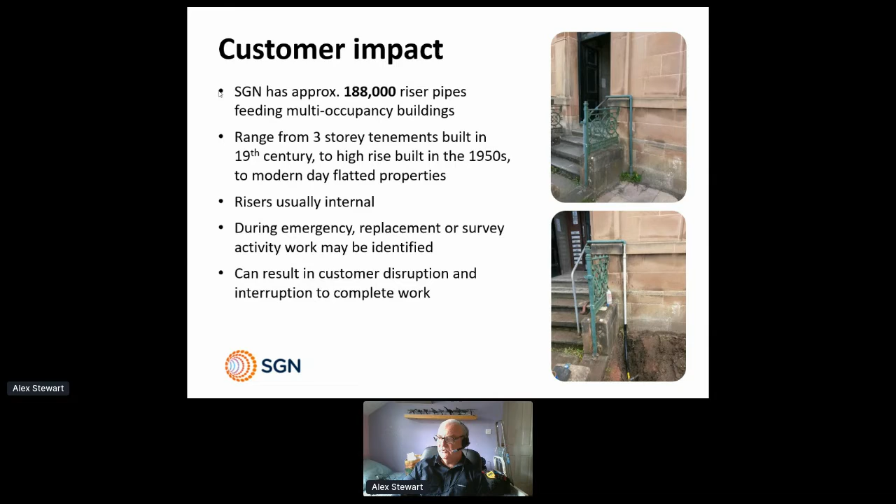So some common issues with riser work that we got from our operations guys. Again, as I said, customer access to individual properties. If we have to do any work in those properties, it invariably involves altering pipework and meter positions if we're renewing the supply. There's also the aesthetics of conventional replacement.

We've had a few projects recently in Glasgow and in London where we've done some work in what's classed as historic areas and conservation areas. So that has an impact with the planning departments.

The need to interrupt the supply to complete the work is always an issue, especially when you've got multiple customers, accessing to turn the customers off and back on again, resulting in customer inconvenience. It's not a one hit - we might be in the customer's house 3 times, 4 times, disconnecting and reconnecting their gas supply before we eventually finish, which can result in access problems.

They may not be able to give us access all the times, so that results in access out of hours. We need to attend out of hours to restore supplies, reconnect customers, get the supplies back on. And that all impacts on the speed of work.

Conventional replacement can take a number of days, from the smallest riser that might take you 2 or 3 days, to a multi-story that can take you weeks.

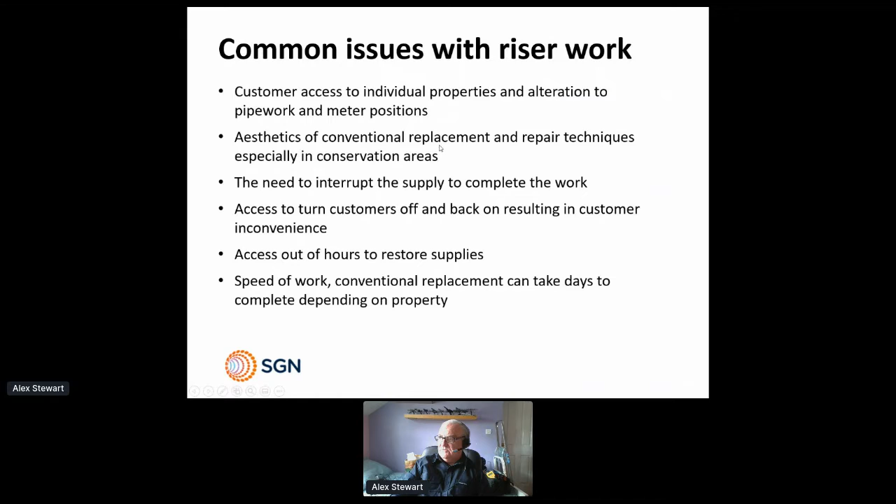So we looked through the industry and we came across this product that was being used in Holland called Microstop, which was made by a company called Ravetti. Pipetech are Ravetti's supplier in the UK. So we spoke to Pipetech. We thought, this sounds like an idea, looks like a solution to the issues that we've identified.

We got in touch with them and we raised an NIA project to look at the whole process, to try and take us through the certification of the process and the product, and actually get to an end result where we could impact the issues that we've identified.

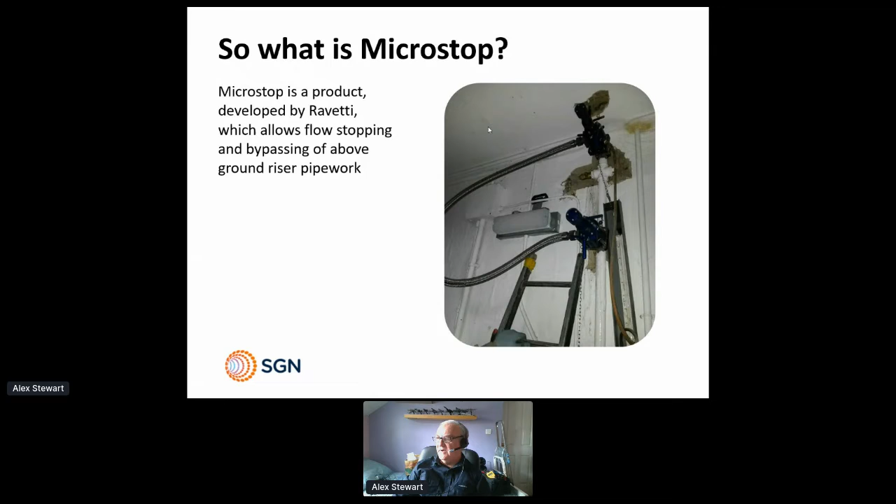So the project was split into 2 sections effectively. We had McCaw at that time, or Rosen as they are now, as the technical service provider. And we gave them a couple of remits.

First of all, we asked them to look to see whether we could match any of the information from Ravetti up against our existing processes to try and do a mix and match to see where the gap areas were. That information was scant, to say the least.

So we then resulted in doing a quite considerable testing program on the product - not just the tooling, but the fittings, its access, and how we would deal with it and the processes that we would deal with it.

Everything from pull tests, fire tests, flow tests, pressure testing, so that we could have some confidence that when we actually got to do a live field trial, or we actually used it live in the network, that it was going to work and give us that security of supply that we needed.

So we eventually got to that stage where we did some live field trials, and it started off fairly slowly in Glasgow, where we had, as I said earlier, a problem in a conservation area, in a Charles Rennie Mackintosh-esque building that resulted in complaints from customers when the initial pipes were run up during the mains replacement project. We went down, had a quick look at it, decided that we could do it much easier than the Repex solution, and actually hide most of the new pipework in the basement of the building, effectively leaving the customer with no change to the entry and the public areas in the stairwell.

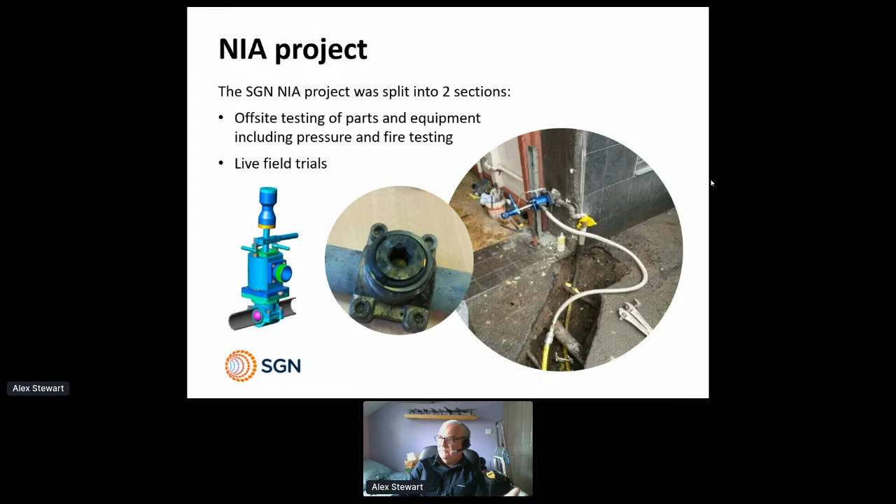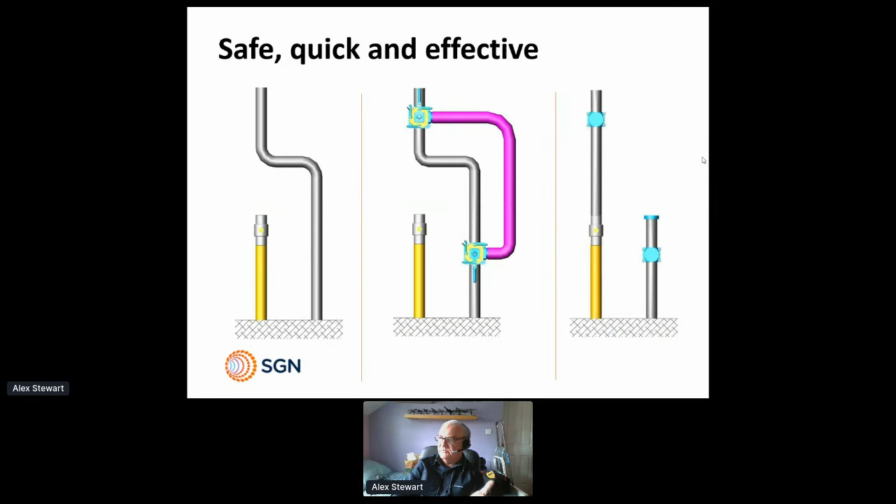This was the prime example in the first place, where we wanted to renew the below ground section of steel, because that was the most at-risk part of the riser. The sections of riser that we've identified, as I've already said, we do surveys on, and the bulk of these risers have extended life availability still available. So this was the primary reason that we did this initially, purely to connect a PE service back onto an existing steel riser. Whether that's the way the diagram shows here, or whether we look at trying to do an insertion through the existing supply, it meant that we minimised the amount of disruption within the building.

As we moved on, the depots themselves quickly took up the mantle of this product, and they started to look at other things that were causing them issues. They had repairs where we had damaged transition fittings at the entry of the buildings where someone had hit it with something. They had some repairs within the building itself where customers had drilled through the riser when doing DIY type scenarios. They had connection jobs that required a number of weeks' notification to customers to turn them all off, and that impacted on the customer service side of things.

And all of these, as we went through this, the operations side of SGN found a solution to by using Microstop in various different ways to remove uncommon materials from risers, and that had an impact on the customer satisfaction scores that we had. The fact that we didn't have to physically access customers' premises to do any of this work, the fact that we didn't have to physically disconnect the customer's supply, and then the impact on all of that, as I've said earlier, is that we don't then have this issue where we have to send what are effectively emergency workers out of hours to common no-gas situations where customers have been left turned off because we've had to do work during the day.

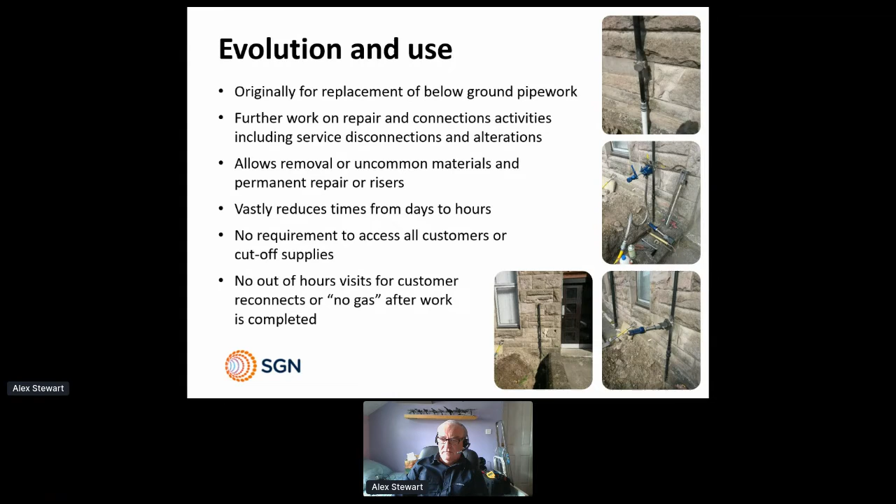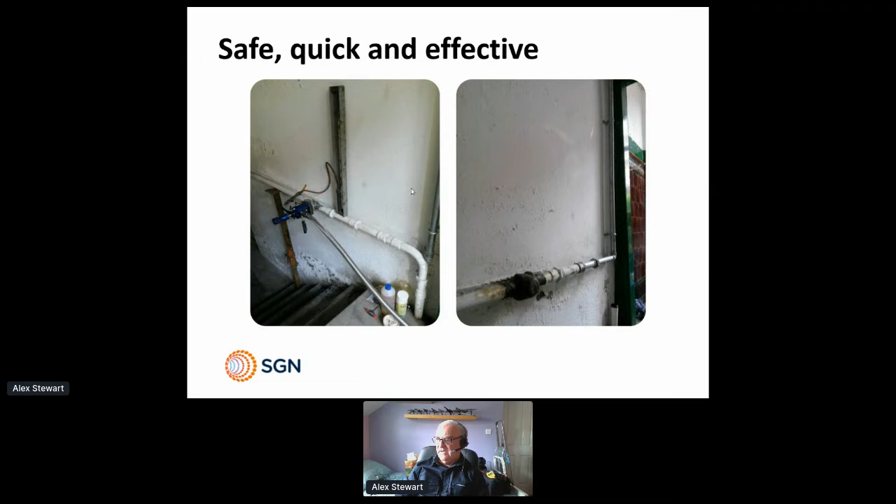So what we've ended up with, after a number of tests and a number of field trials, and we actually did about 110 different field trials during the project itself, is a very safe, quick and effective way of doing the work on a riser that we need to do without having the impact on either the customer or ourselves. It gives us a much quicker solution where we can effectively complete the job in a matter of hours rather than days, without the need to access the customer or turn the gas supply off at all.

So, in summary, Microstop is a very quick solution to riser replacement, repair or connections work. It's tested off-site and on-site and approved for use within the SGN network. We've actually rolled it out to both Scotland and Southern, and they're actively using it in their day-to-day operations. It doesn't require access to the customer premises or alteration to the internal pipework. There's no requirement to isolate supplies or interrupt any customers. It's much quicker and cleaner than a conventional technique, and it's more aesthetically acceptable in common areas than conventional replacement or repair techniques.

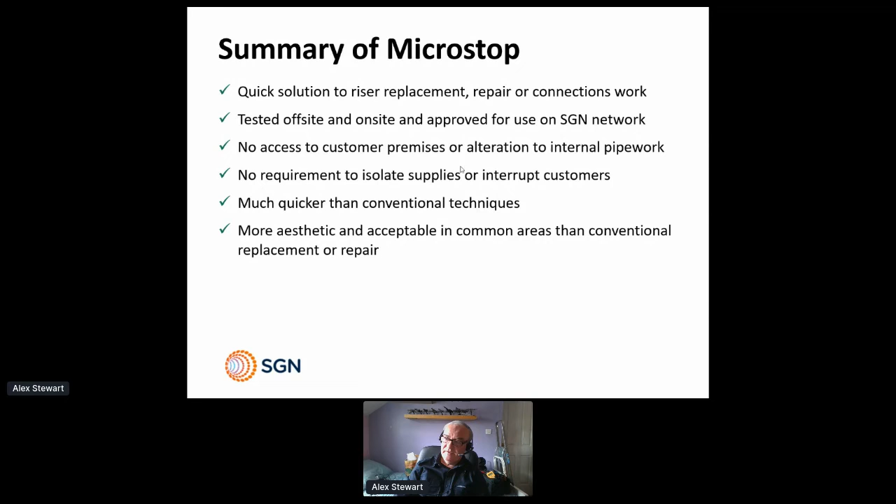And I'm happy to take any questions from that. Well, that's excellent. Thank you, Alex.

Just by listening to your presentation, I can see some of the obvious benefits you highlighted. So a couple of questions. First, around monetary value - you spoke a lot about customer service. Could you put a monetary value to the benefit of Microstop?

The monetary value is difficult because it depends on the scenario. We've got many different types of risers. We predominantly did the field trial in Scotland on risers in the early 20th century building type scenario, and we'd suggest you're probably saving 30 to 40% of your standard riser cost, which goes up considerably depending on the riser scenario. If you're not having to do external high-rise scaffolding, there's a major impact on both timescales and cost.

In terms of sizes, does this cover 3/4 up to 2 inch? No, it's 1 inch to 2 inch at the moment - inch and quarter, inch and a half, and 2 inch. There is a 3 inch variant which we haven't field trialed yet, but our operations guys in the south are actively looking at developing that, so the full size range for the product will be 1 inch to 3 inch.

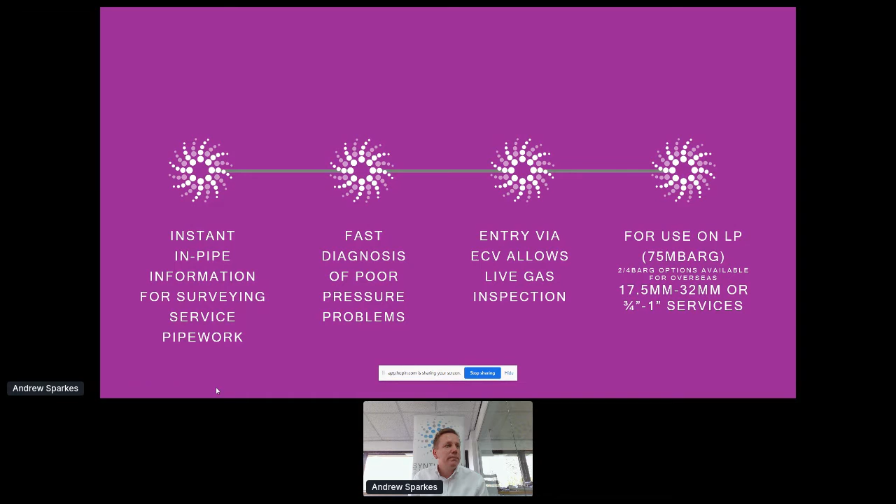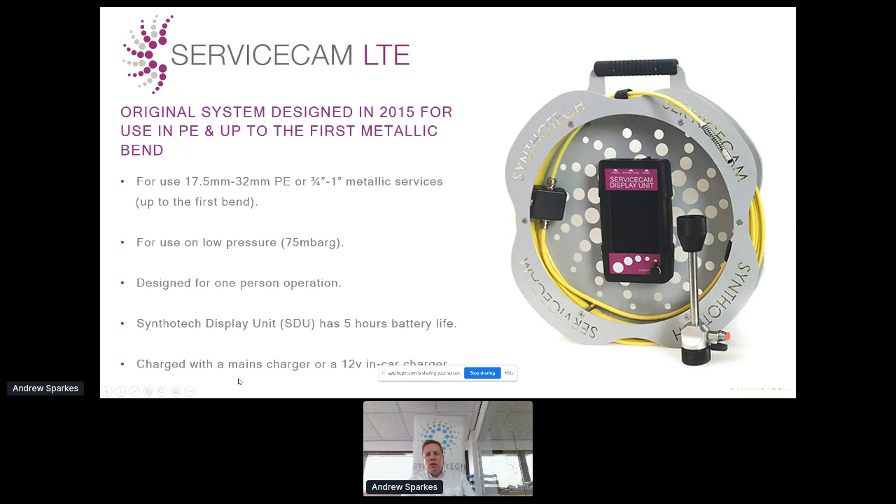The first ServiceCam, launched in late 2015, was ergonomically designed to be a one-person operation and to be able to navigate up to 2 90-degree bends in PE line services and up to the first bend in metallic services.

The kit comes with a bespoke 9.5mm camera head with shortened focal length due to the size of the pipe it will enter. It has 6 LEDs to illuminate the pipe and a spring to allow bend navigation.

The picture from the camera is viewed on a compact and functional ServiceCam display unit, which is battery powered for up to 5 hours use from full charge. For charging, a 240 volt main charger and 12 volt car charger can be used.

There is a low power indicator on the screen, and if recording is required of any footage seen, then the camera can be linked to the SKU recordable unit, which is part of our main survey kit.

The insertion system is suitable for both 1-inch and 3/4-inch ball type ECVs. It will screw directly onto a 1-inch BSP thread, with MSEX adapters available for 3/4-inch.

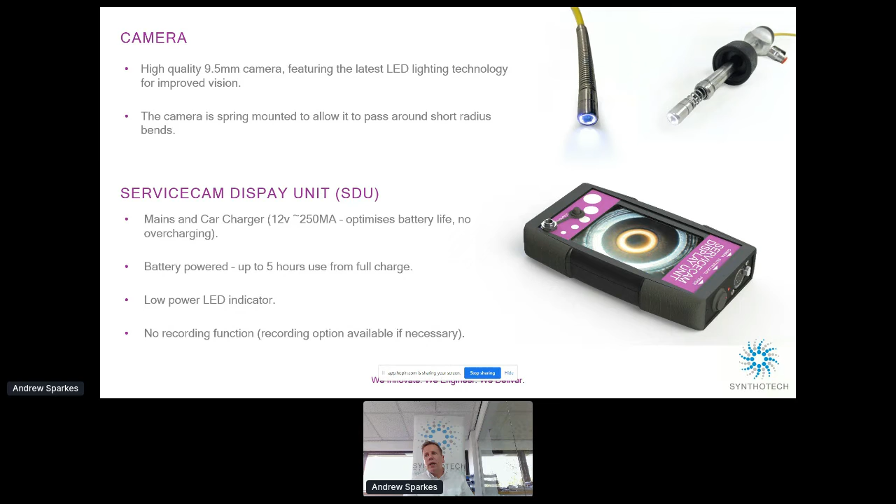In terms of glanding, the ServiceCam is made up of 5 elements: 3 rubber seals and 2 O-rings. Silicone grease should be used sparingly to help the camera head through the rubber elements prior to survey.

Since its launch, the benefit of this product to the gas distribution industry has been immense, from quick and effective fault finding on 1-inch line services to rapidly identifying poor pressure to a property, finding obstructions or water in the pipe, being able to quickly trace the line of a service pipe and locating mains connections.

For build-overs and GSMRs, cost savings from no excavations on expensive customer driveways, and reducing fault-finding works by over 2 hours. Listening to feedback from the gas operatives using ServiceCam, the second version was developed with a tighter spring to ease the distance pushed and also reduce snagging.

When used in conjunction with the specially designed survey guides, this enables the camera to navigate up to 3 metallic bends in metallic services from 3/4-inch up to 1-inch. The increased functionality these additions have given means ServiceCam is the first tool out of the bag when finding faults on services.

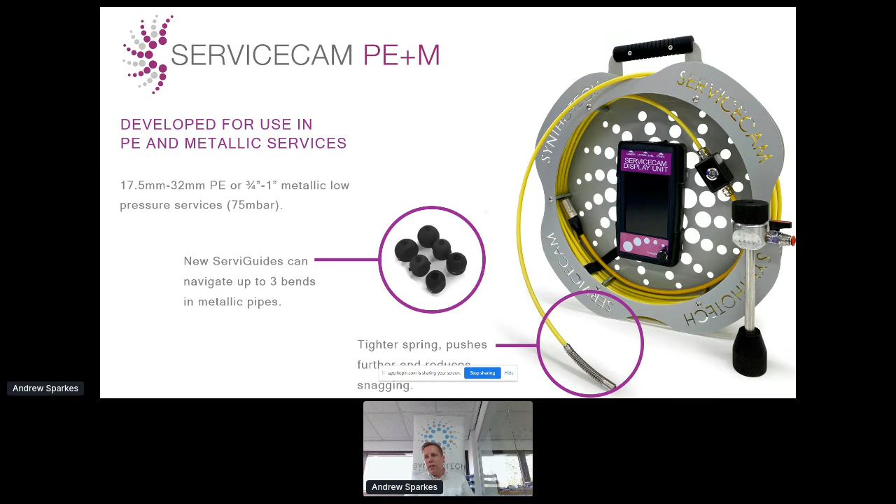Synthotech's international distributors soon began to hear of the success of ServiceCam in the UK gas market, and opportunities arose for the third version of ServiceCam to develop, allowing surveys to be completed at up to 4 bar in pressure. Other new additions of a new enclosed lock and reel frame for easier unreeling inside properties, and meterage shown on the display to pinpoint the exact location of an issue, were incorporated.

Ireland, Colombia and Australia are now avid users. As an example, in Colombia, the 4-bar system is used for investigating potential gas theft and can easily detect where services have been tampered with. ServiceCam in this particular country paid for itself on its first job, where an illegal bypass had been added to the service, saving the gas transporter an untold amount of lost revenue.

Just to confirm, the ServiceCam range now includes the ServiceCam LTE for PE only, ServiceCam PE and Metallic, and ServiceCam Pro.

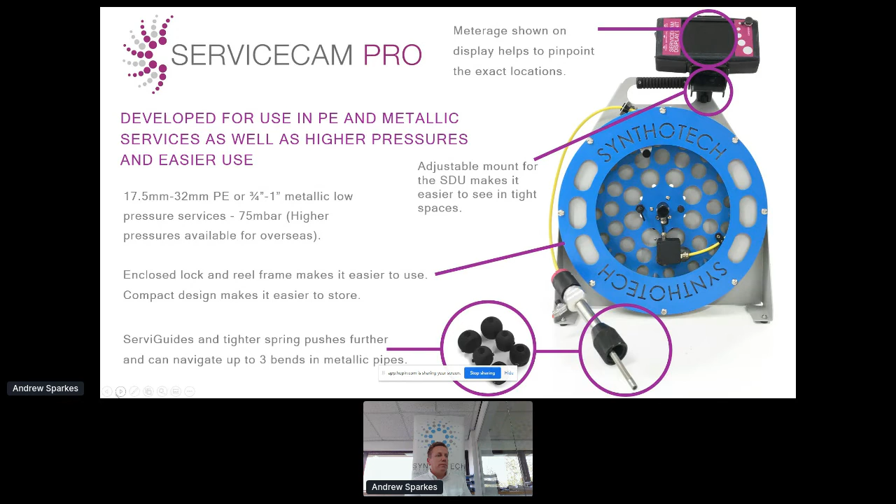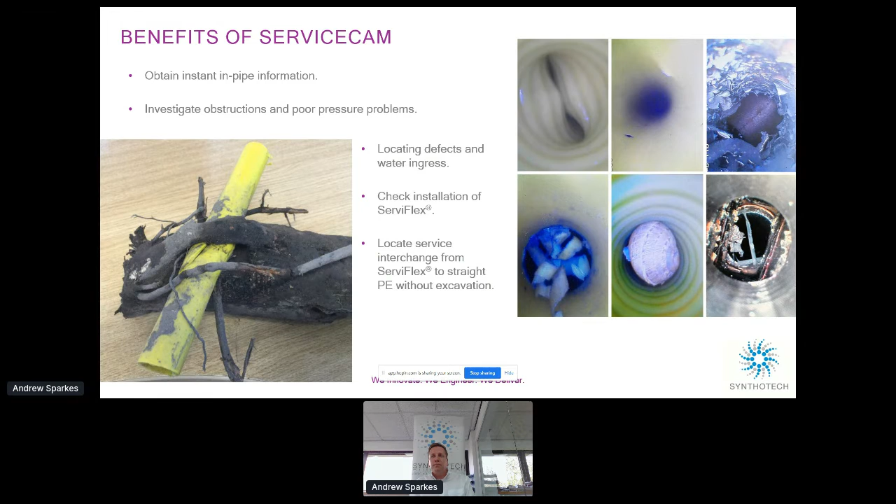Throughout the 4 gas distribution networks, there are numerous examples of how using ServiceCam can save the network money. From locating and pinpointing services on DR4s, reducing the amount of time on site and eliminating misdigs, saving on average £1,250 per job. On GSMR, ServiceCam was shown to save over £227.

A build-over service was surveyed and located within a new driveway, reducing the disruption to the customer, and was shown to save £645. And then a blockage in a steel service pipe under a new driveway was shown to save £450 by reducing the equipment and personnel required on site.

This is just to name but a few.

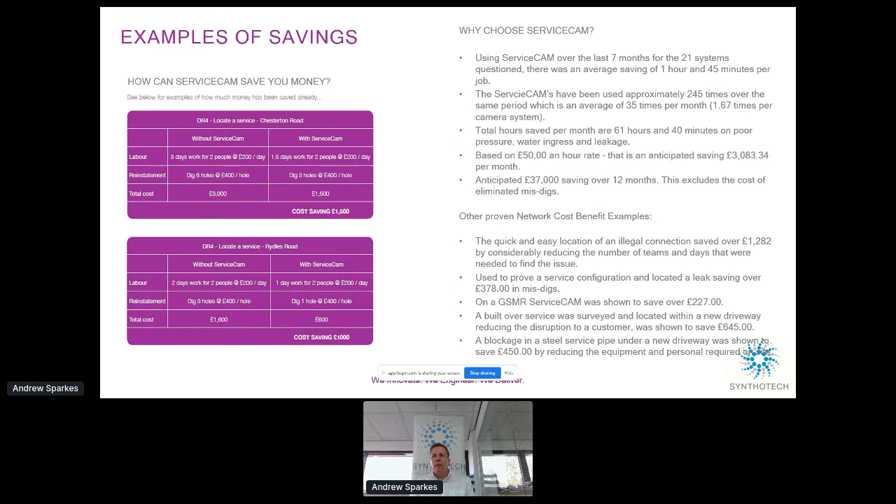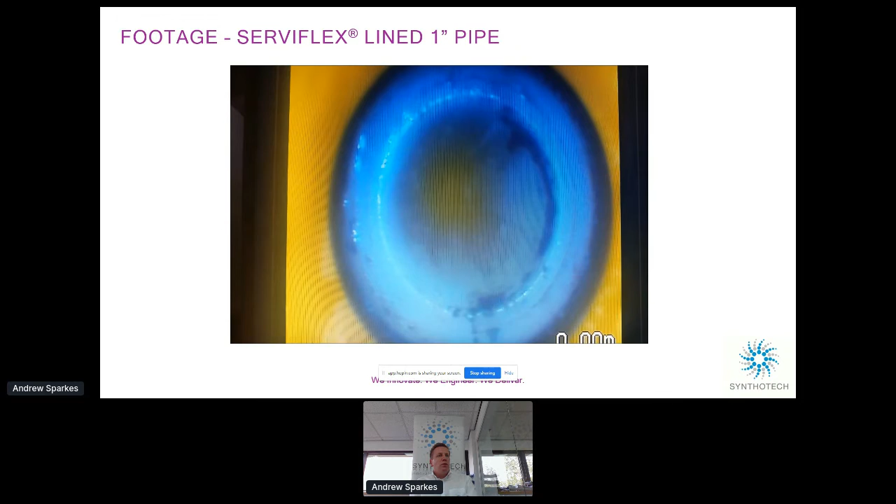The footage in the video above shows where both PE and ServiFlex lined pipe have been damaged and water has ingressed into the pipe, forming water globules and white marks from water being inside the yellow ServiFlex pipe. This gives the repair teams chances to do the repair work and make informed decisions.

Synthotech, as part of an NIA with Northern Gas Networks, developed a water extraction ServiceCam after this to be able to get the water out of the service at the same time.

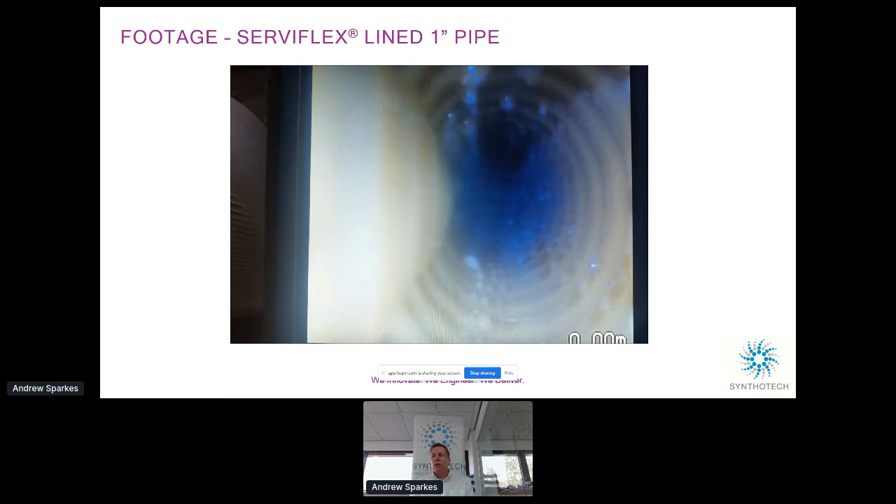Recent customer satisfaction surveys of the networks have given ServiceCam a 4.9 out of 5-star rating. And now that ServiceCam can survey both metallic and PE pipes, it has become the go-to piece of equipment to save time and money when looking for issues relating to service pipes.

The feedback gained was that using ServiceCam saves on average 2 hours per job and is used on PE services 2/3 of the time.

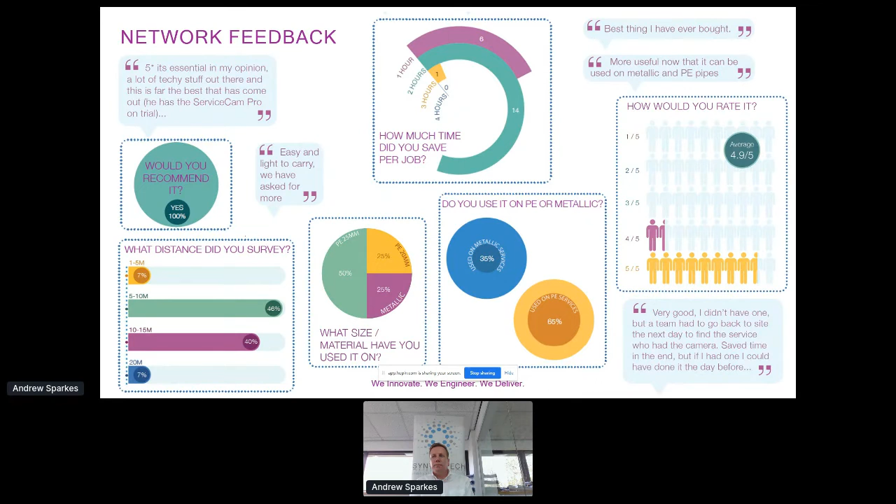All 4 networks have seen the benefits of investing in this uncomplicated and easy to use one-person traceable camera, highlighted in the numbers that continue to grow across the country since its first introduction some 5 years ago.

In conclusion, the benefits of ServiceCam include emergency response and fault finding, investigating obstructions and pressure problems, locating defects and water ingress, and locating service interchange from Serviflex to straight PE without excavation.

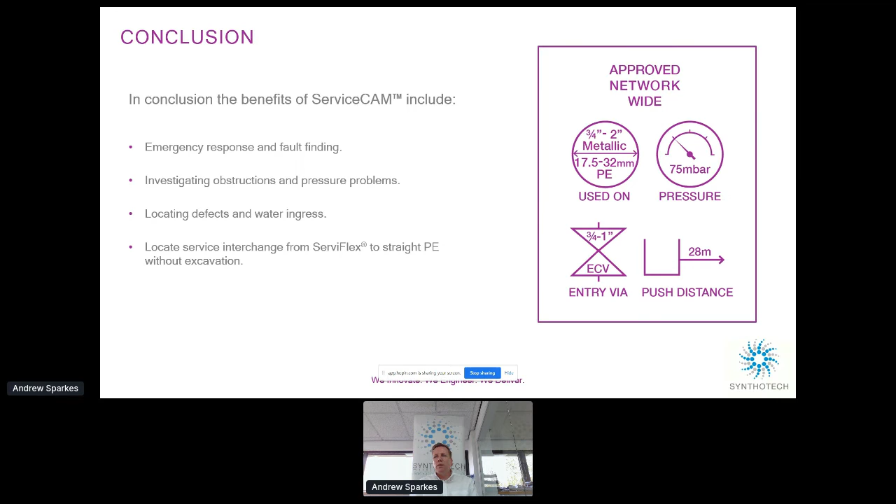And that's it. If you need any further information, please feel free to contact us, and happy to take any questions.

I guess just a question actually, Andrew, is the kit supplied, and is there a lot of training involved for teams or users?

Yeah, there is training. It's only a couple of hours training that's required. It's just to go through safe insertion of the camera, because obviously it's going into live gas. We generally would train, before COVID, 6 operatives in a classroom basis on a designed rig, and that would take approximately 2 hours. But obviously, during COVID times, we've actually developed a video online that can be used to do the training.

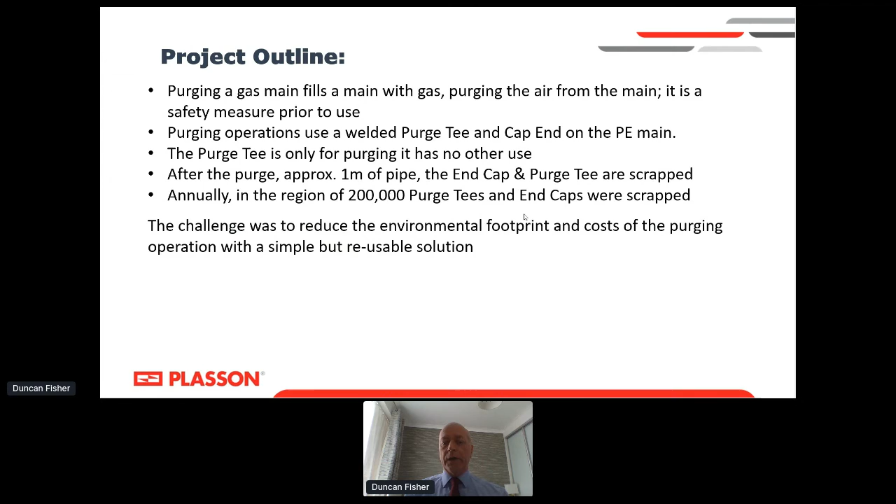After it has been purged, approximately a metre of pipe, the end cap and the purge tee are typically cut off and scrapped. Annually, that's in the region of 200,000 units being scrapped. The challenge was to reduce the environmental footprint and the costs of the purging operation with a simple but reusable solution that was easy to implement.

Our partners in this were Cadent and ROSEN. Cadent actually commissioned the project, and ROSEN were deeply involved in the technical aspects of specification and of the actual testing of the system.

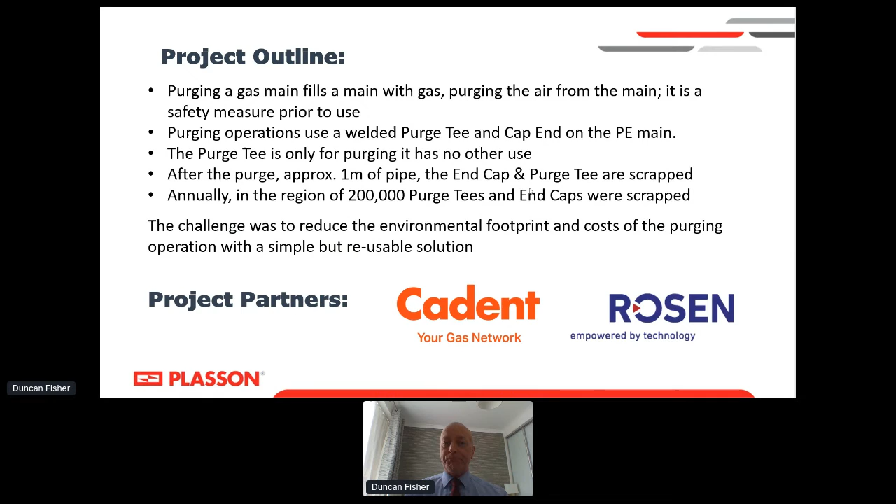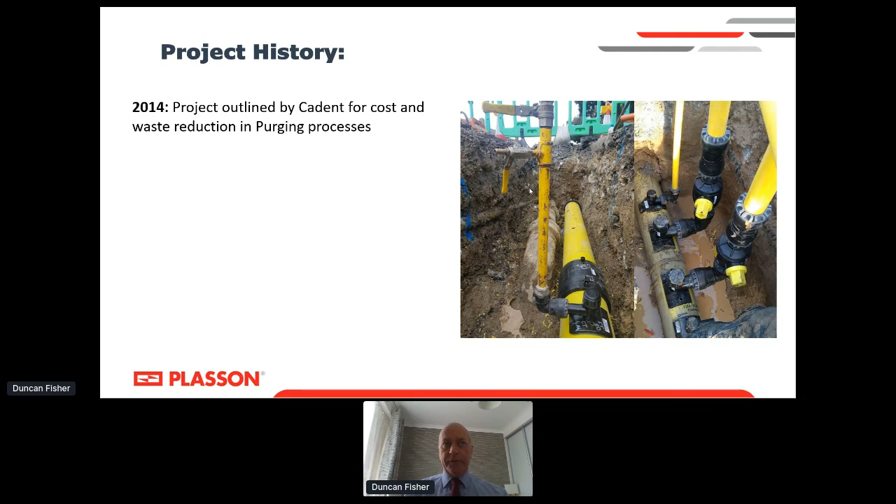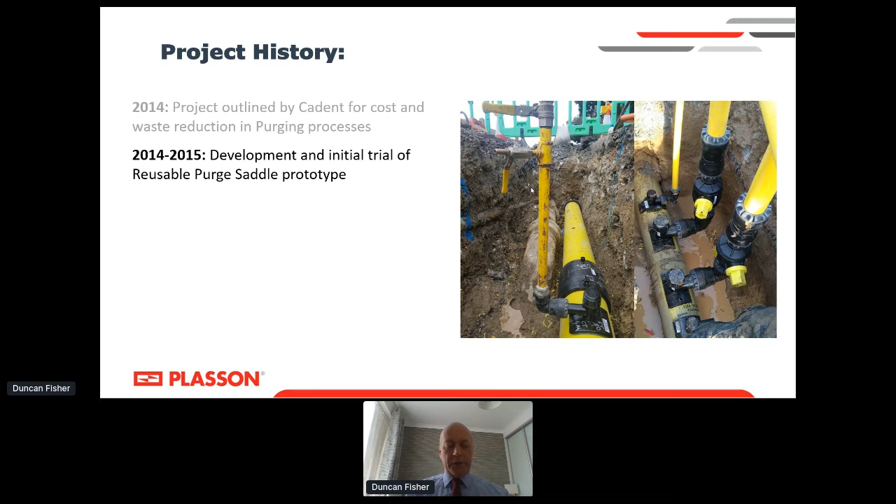In project history terms, we started when the basic outline was identified by Cadent in 2014, and for the next year we worked on a prototype of a purge saddle that was reusable. Having developed and field trialed some prototypes, it was decided to change direction, and in 2015 to 2018 we developed the range of fittings shown in the pictures to the right, for both purging and for temporary bypasses.

These have been in use now for a number of years very successfully, but they're still based on a top tee welded to the main. It's a standard top tee and not dedicated to purge, which means it could be reused for the final domestic tie-in, but it still, in a lot of cases, was sacrificial.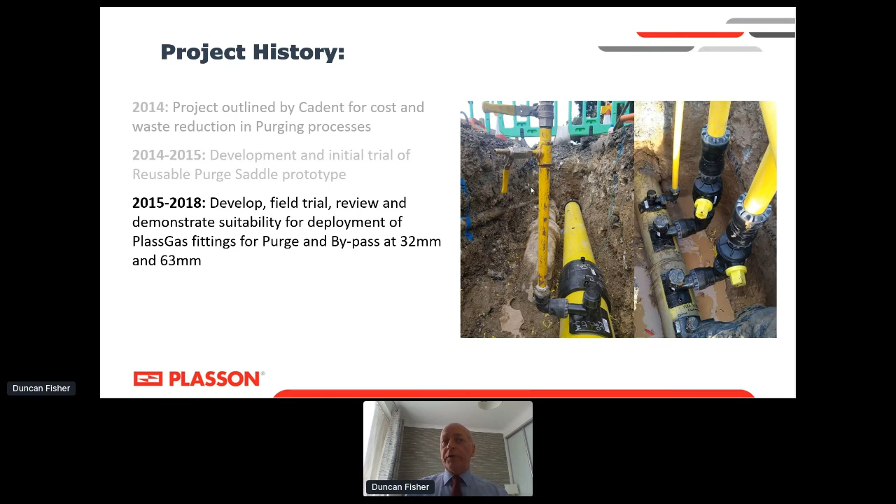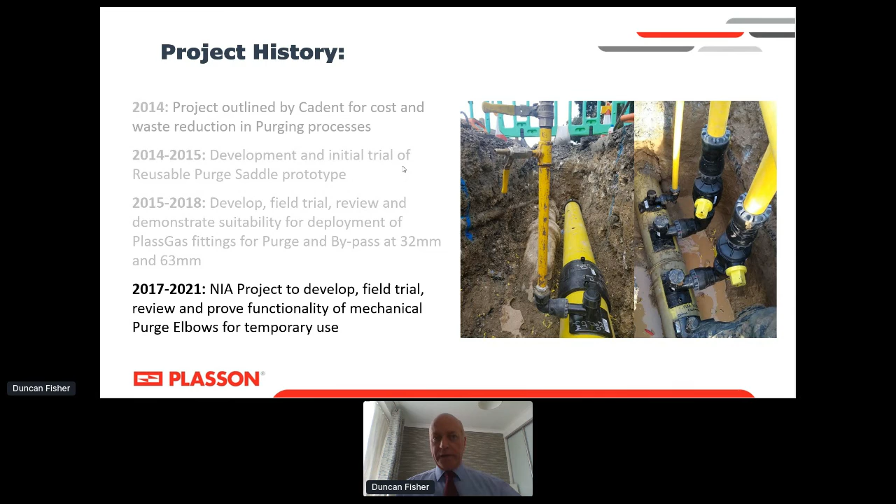So after getting partway through the project, we reviewed it, and then in 2017 started work on a project to develop an alternative solution which had no sacrificial part whatsoever. It was an NIA funded project and now has been concluded.

The product performance specification was written by ROSEN as a follow-on to the previous work we had been working on. The concept was initially tested with full laboratory testing by ROSEN, and then a field trial with Cadent staff was conducted by ROSEN.

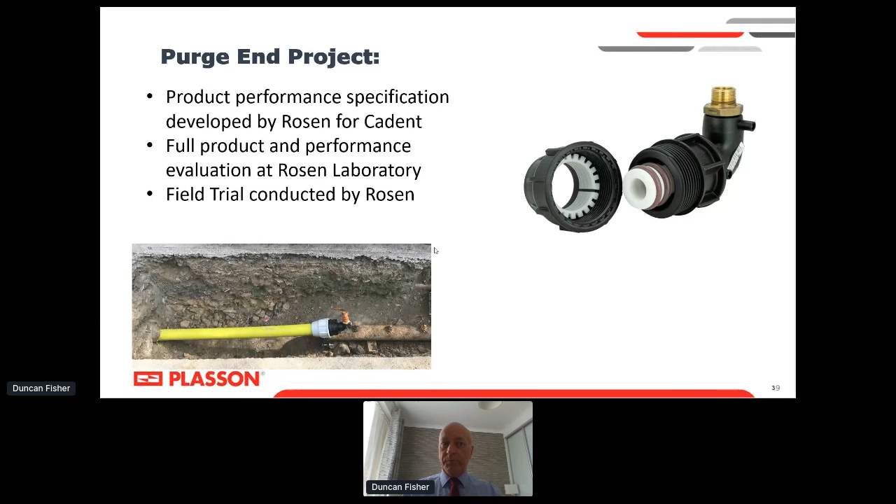There was analysis of the fittings after use in the field. Having recovered them from the field after multiple uses, we retested them and analysed that retest result. We also took in user feedback from the men in the field who had actually used the fittings.

There was also a need to develop an appendix to PL3, which is the specification for mechanical fittings for use on gas mains. An Annex P has been written for temporary use fittings, which I believe is due for publication shortly. The NIA Closure Report was issued in February of this year.

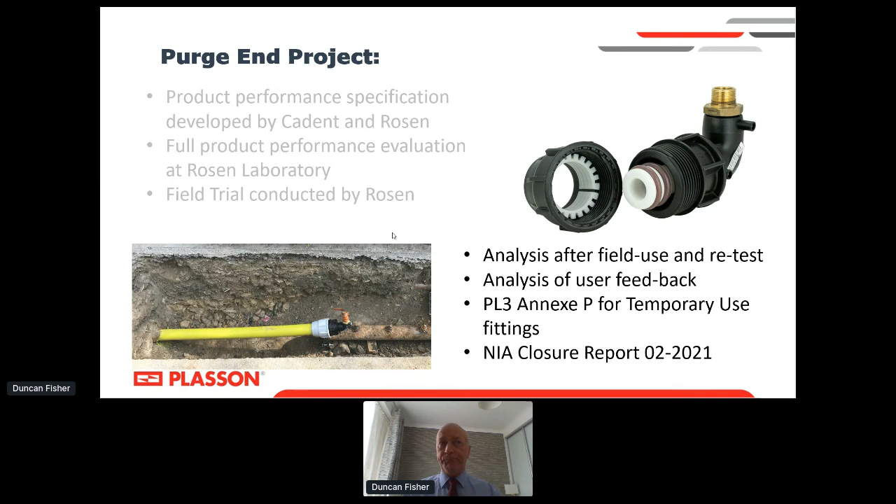Essentially, a purge end fitting is reusable. We reckon that in excess of 50 uses would be easily achievable.

The advantage of this temporary use fitting is that each time it is used, it is tested for integrity before gas gets anywhere near it. So you have a high degree of confidence that once the fitting has been assembled on the pipe and tested, you will have a very satisfactory outcome.

There are two seals that seal inside the bore of the pipe, which escapes the problems associated with sealing on the outside, which can be damaged on this sort of pipe where it has been inserted through an old main. The joint is end load protected for security so that it won't pull off the end of the pipe.

It's estimated that it will pay for itself within 5 to 10 uses, depending a little bit on how you calculate it.

One area of potential saving that hasn't been quantified, but which we believe will be of value to the industry, is that it has the potential to reduce the excavation size for the receiving pit when you're doing a pipe push through an old main.

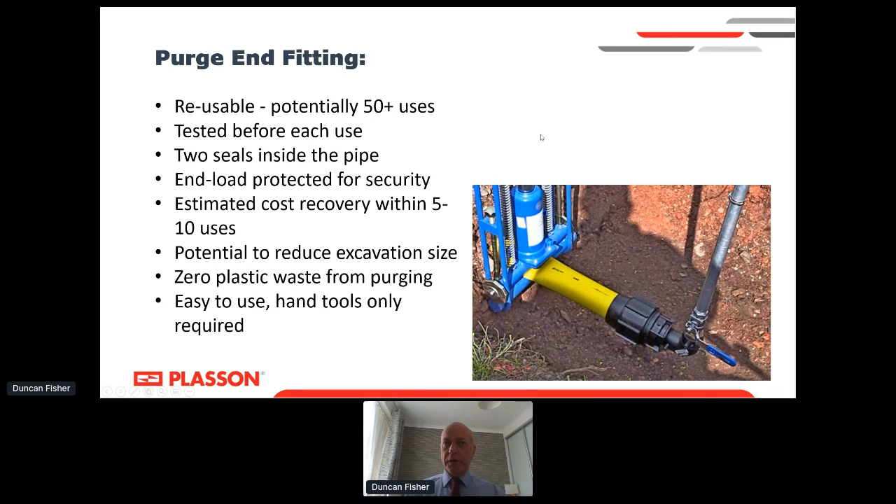From the assurance point of view, it meets the GIS PL3 and Annex P specification. It reduces the costs of the application. The job of purging actually becomes cheaper because you are reusing a fitting, and you also have the associated benefits of footprint reduction from the excavation and the environmental benefit from plastic waste reduction.

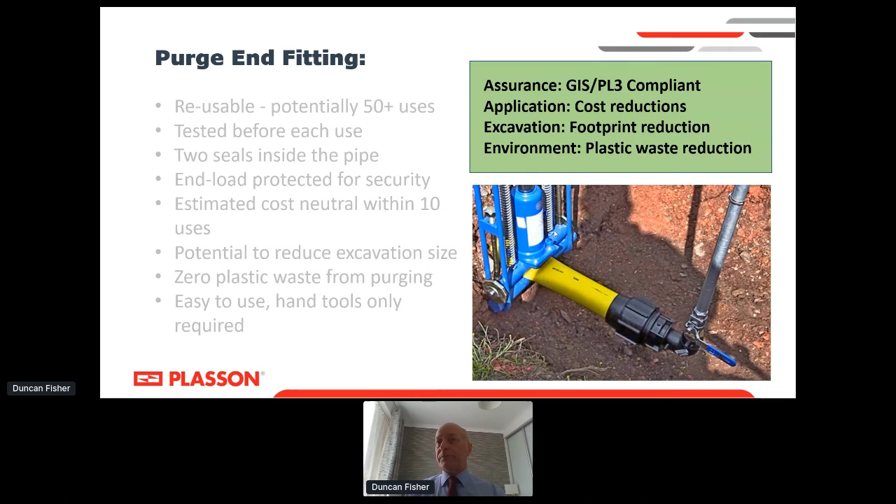Quite simply, a reusable fitting is suited to use in this particular type of application. It's tested before every use, so there's no need to track the fitting for its number of uses. This was considered during the project, but the sheer difficulty of trying to manage tracking of a fitting was not practical. But because it is tested before every use, you do have that check that everything is secure from the moment you commission it.

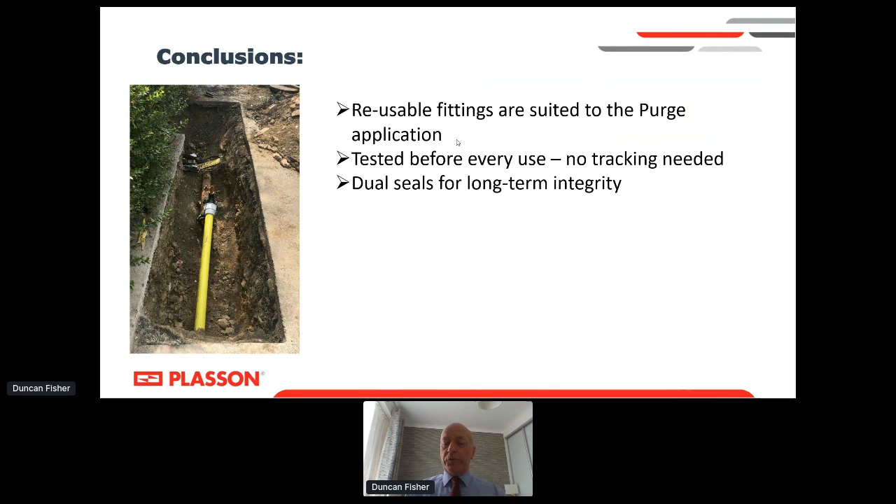Dual seals are there for long-term integrity, to be sure, as they say. Simple tools and quicker processes. You don't have to spend time dragging your electrofusion control box up to the pit and welding things on and allowing for cooling and all the rest of it. It is a matter of fit it and use it.

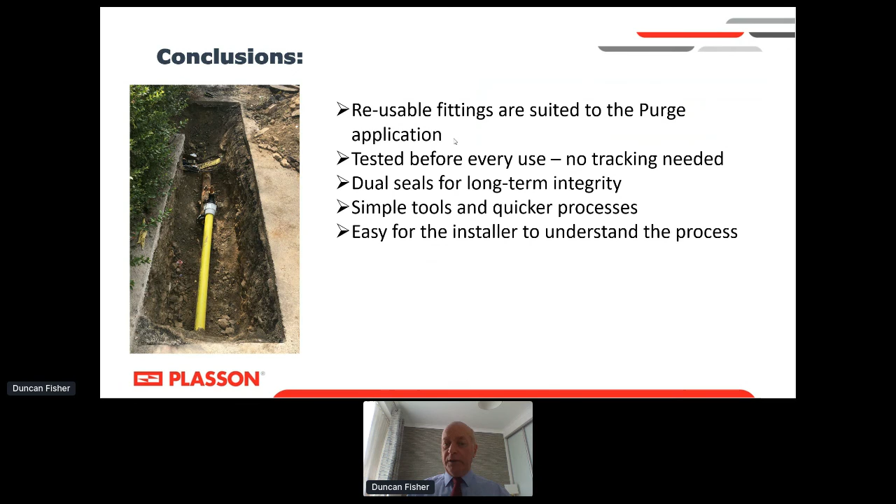From the installer point of view, it's not exactly rocket science. You slacken the nut off, you push it onto the end of the pipe, you tighten the nut, and that is basically the abridged form of installation. Very simple.

As I mentioned before, the mountain of waste that was created by cutting purge tees off is eliminated. We all know the sensitivity of plastics in the environment currently, so the more we can do to remove it, the better. And there are significant financial savings, both in the reduction in costs of the consumables used in the purging process and reductions in the cost of waste disposal, not to mention the reductions in excavations and reinstatement.

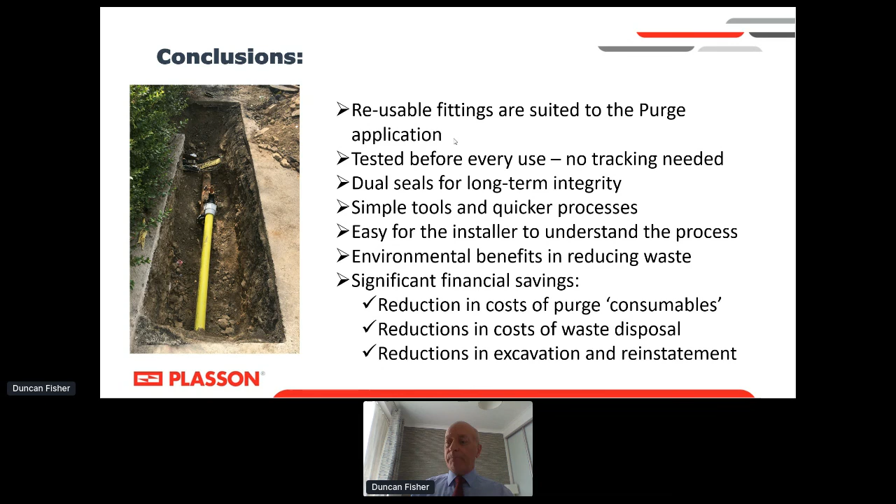So the product itself is very simple. There are 4 sizes: 63, 75, 90 and 125. And they are reusable until sufficient damage has been done that they fail on test.

And we confidently expect there will be fittings that will be used for 100 purges before needing replacement. So it is a significant benefit from the point of view of costs for the task, but also it makes it much easier for the guys doing the job. And the feedback generally from the staff doing this process has been very favourable, to the extent that they want all 4 sizes available tomorrow.

We are in a position where we are getting the first stock in the next 6 weeks, and we'll be rolling it out to the first users in Cadent post-trial shortly thereafter. It's a simple process and available, as I say, very shortly.

We have a question about training of the operatives. It is a very simple fitting to use. The complete process has been videoed with instructions, but we can provide separate instructions. And simply the pipe end has a very small bit of preparation to remove the sharp edge of the internal wall of the polyethylene.